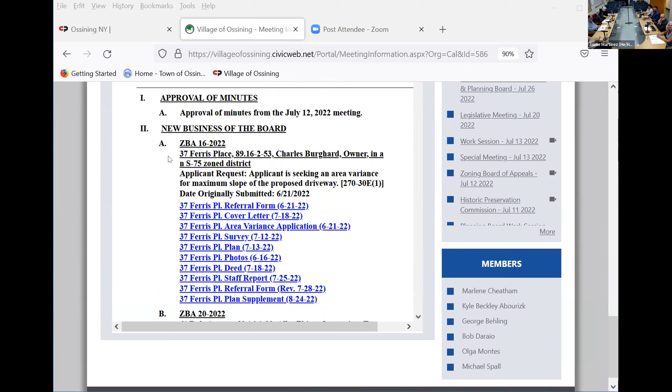When you come up before the board, you must provide your name and your address. Remember that you are addressing the board, you are not speaking to the applicant or their representative. Applicants and representatives, please remember that you are addressing the board.

We're also using a hybrid format, therefore the public will continue to have the opportunity to see and hear the meeting live through Zoom and provide comments during the appropriate time. In order to participate, please do the following.

Members of the public attending online via Zoom may use the raise hand feature at the appropriate time. If you would like to make a comment, the feature is located at the bottom of the screen. Those attending via telephone can press star nine.

The meeting host will see that your hand is raised or that you have pressed star nine, and will unmute those waiting one at a time so that you can speak.

Comments can also be emailed during the public hearing to Planning Director Jaime Martinez at jmartinez, M-A-R-T-I-N-E-Z, at villageofossining.org.

The meeting will be recorded and a transcript of the meeting will be available at a later date. There are some ground rules. In order to keep the meeting orderly and ensure we get a clear recording, please follow these ground rules.

When you're given access to speak, please state your name and address. If you are speaking during the public hearing, please limit your comments to the matter which is the subject at hand. And if any speaker is inappropriate, they will immediately be cut off and access removed.

So welcome to the meeting, and we will start by doing our roll call.

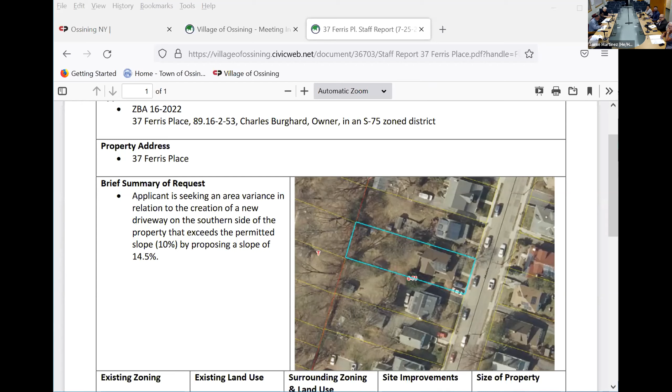Liz, are you there? Can you hear me? Yes, we can now. Great.

As Jaime had mentioned, we are looking to extend an existing driveway, basically to match the driveway of the adjacent property owner and the driveway on the opposite side. There is currently a small parking slip at the top, and then a grass slope leading to the backyard.

Share your screen. Would you like me to share for you? Great, okay, one second please. And here we go. Can you see it now? Yes. Great, sorry about that.

As I had said, we have an existing parking slip at the top off the street, and we are looking to create a driveway along the side of the house to allow access to the rear and to allow for a second car. We are looking to match basically the grade of the adjacent driveway, which is 2 to 4 feet away from the proposed driveway, and the grades would basically, for the most part, match.

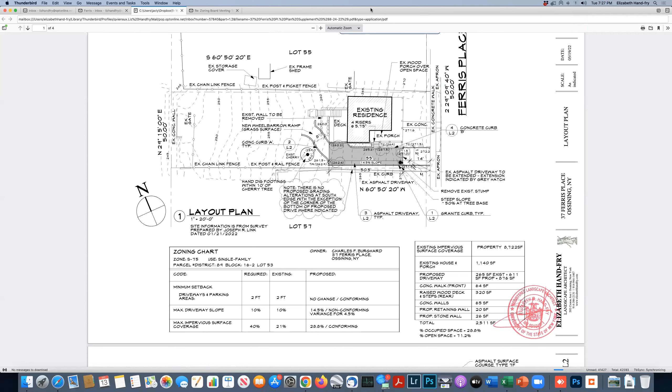Yeah, she's doing the 61 Dale Avenue.

So for 61 Dale Avenue, Alba Zhina is the owner. Let me get a little rundown of what the project is. The applicant is seeking area variances in order to construct masonry and stone stairs on the side yard.

So we have the applicants, the architect here, Michael Bevivino. The architect, Michael Bevivino, is here, as well as Alba Zhina, the owner. And they're prompting the family to come forward.

Good evening and welcome. Good evening, everybody. My name is Michael Bevivino. My architecture firm is Named Architecture. We're located in Ossining at 6 Americo Circle, actually right around the corner from 61 Dale.

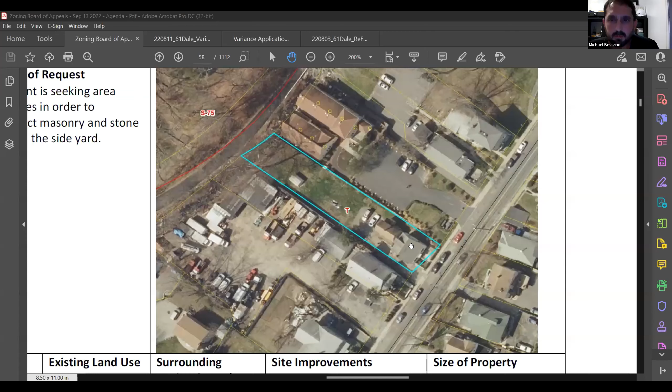No, there is a stairwell in progress, but it was never completed. Hello? Am I allowed to speak? Not yet, not yet. Thank you.

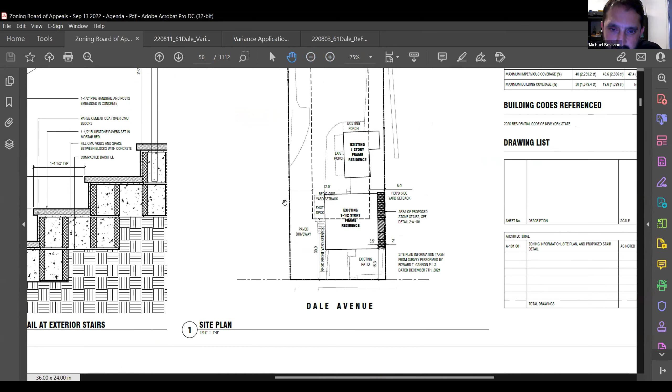So taking a look at the site plan, here's the existing home at the front. Sorry, is that better? Yeah. Okay, so this is the location of the home at the front of the property and the second one at the rear. On the left-hand side is the existing driveway headed down into the rear of the property. And on the right-hand side is where the proposed stair is.

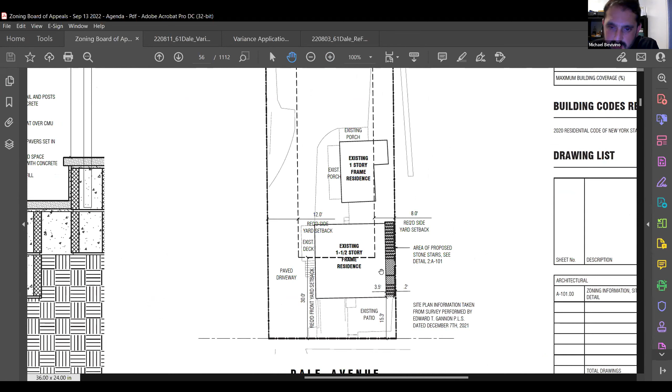So we're requesting a variance from the required 8-foot side yard setback, as well as the combined setback of 20 feet.

Just zoom out and show some pictures. Alba had started constructing the stair before realizing that they needed a permit for it. It's a little glitchy, but you can see the stair is partially constructed on that right-hand side. It's planned to be constructed out of CMU and bluestone pavers.

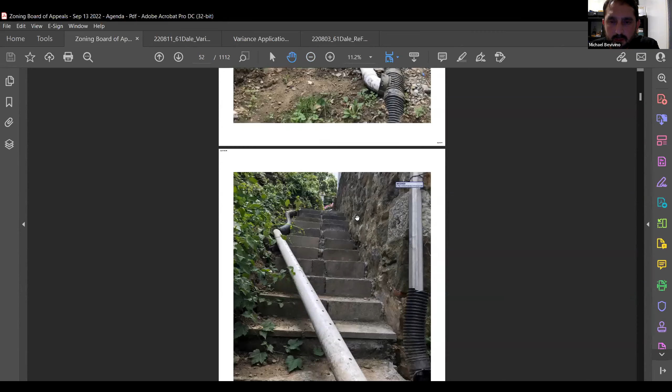Sorry, this is so jumpy. The stair will only add about 99 square feet worth of impervious surface. The existing impervious surface is non-compliant, but it's a de minimis amount of additional area.

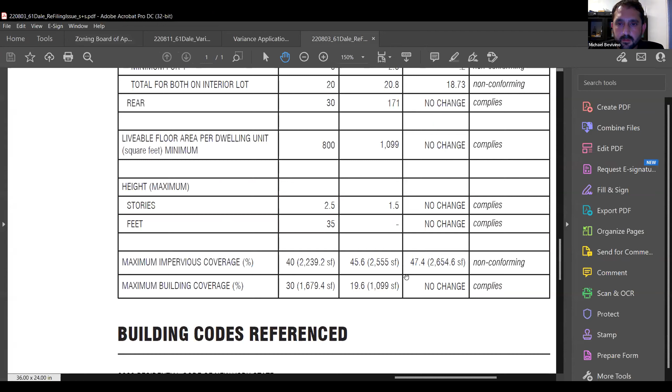Anybody have any questions? Are there any questions from the board? I just want to be clear. So what we're saying here, in the impervious coverage, is supposed to have 40%. It's already, the existing is 45.6%. And we needed a variance of basically 7.4%, which would make the impervious coverage 47.4%.

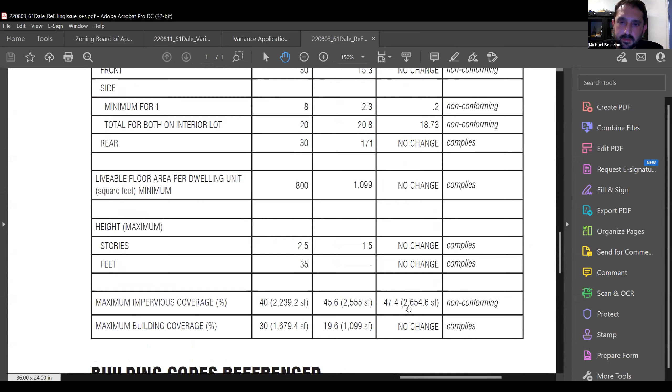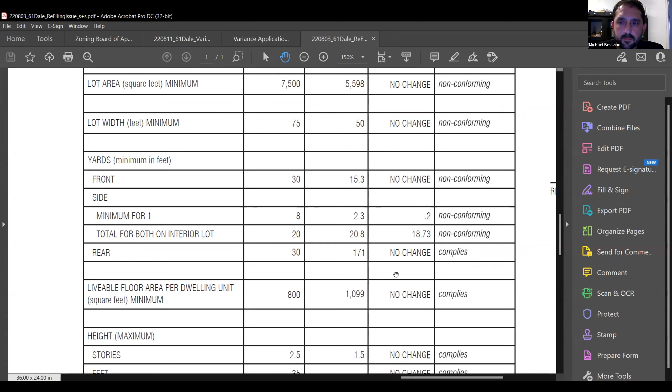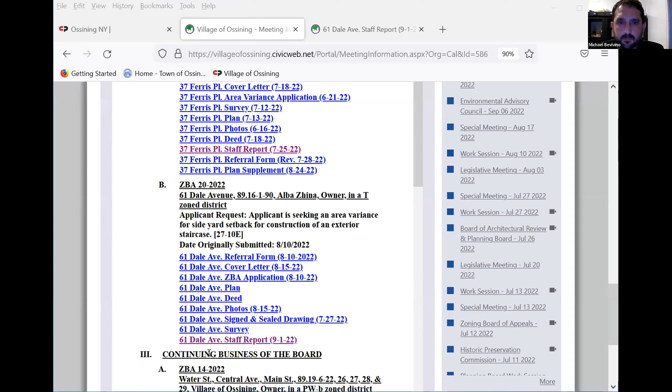Okay, no more questions. Yeah, Michael, this is Mike Spall. I was wondering, the purpose of the stairway on the right-hand side being built out of concrete materials, is that for egress and entrance by the upstairs tenant?

It's a convenience stair, just to access the rear of the property. So it is not the sole way for that tenant to get in. So just to clarify, the second unit is actually in the back, in a separate structure, so it's not the upstairs, it's in the back.

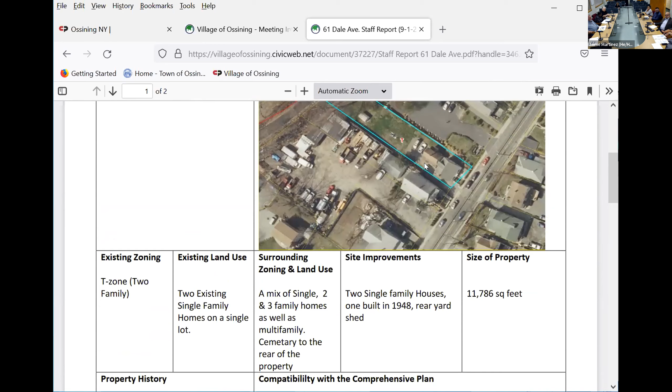So as he was explaining, the only way to access it right now is to walk down the steep driveway if you're not driving. So the idea of the stair was to provide access to that rear structure for someone walking.

If I can, you can see here's the building. This is the second unit in the house back here. And so, as you mentioned earlier on, the only way to get into that second property is to walk down this driveway, which doesn't have steps. And in the colder months when it gets icy, it can get a little more dangerous. So therefore, they are trying to add a separate set of steps here so that somebody can walk to that back.

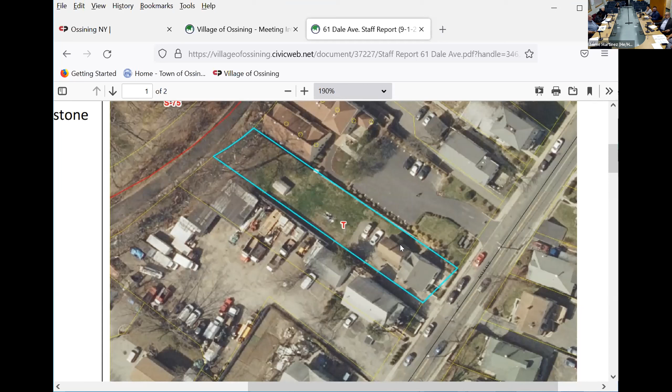One thing I just want to mention is that there's a number of other properties on that northwest side of Dale Avenue that have stairs constructed in their side yard setback, essentially to address the same problem.

There's no indoor access to that second structure? They're not connected, the two buildings? No.

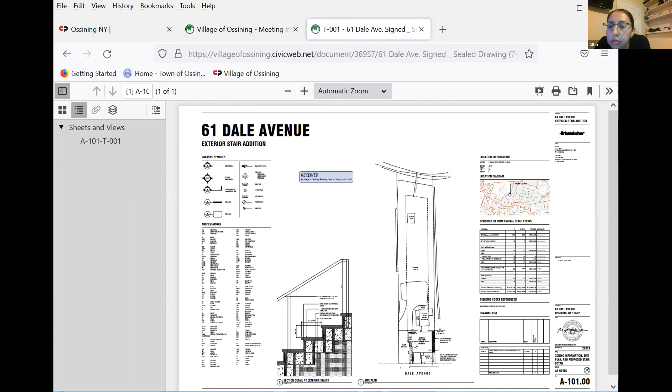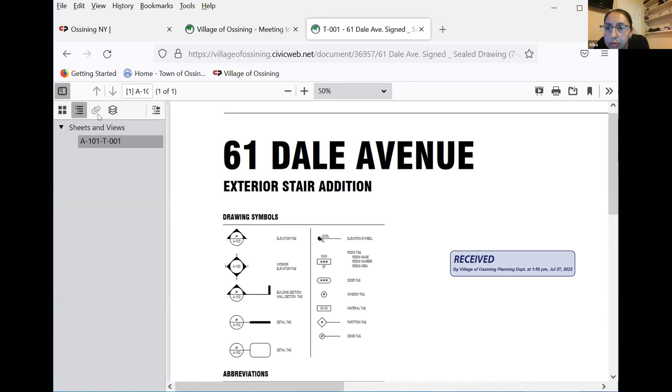It's too narrow, only enough for the car, so they have to build them on the other side of the house. Plus, if my memory serves me correctly, the existing was on the left-hand side of the property, the first building - I believe it was wooden stairs.

Away from one side. And so the total of both is - we don't know the setback, we don't know. We've gotta meet that setback - let's take a survey.

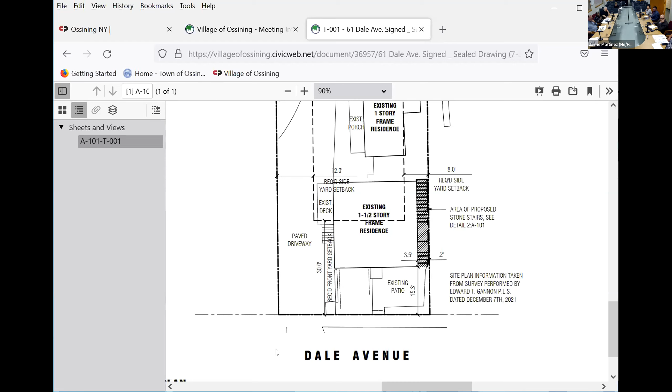Sorry, we're just trying to make sure we have the variances right. Sure. I think he has it down there.

It's 18.5 - is that from the deck or the house? That's to the house, not from the deck. The deck would count for this purpose. We need to know the setback to the deck.

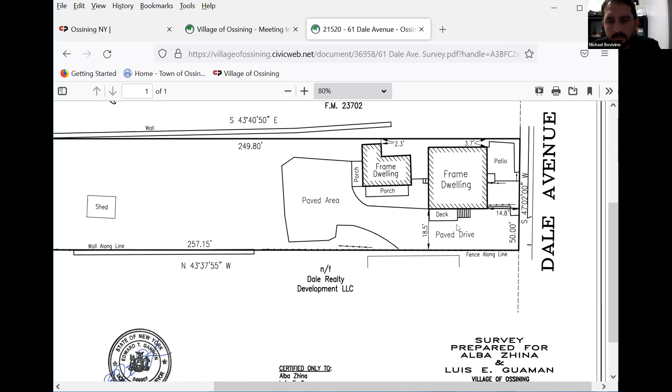I can give you that dimension right now if you'd like. Yeah, sure, you want to go ahead and share your screen? So we know how to do it. Sure.

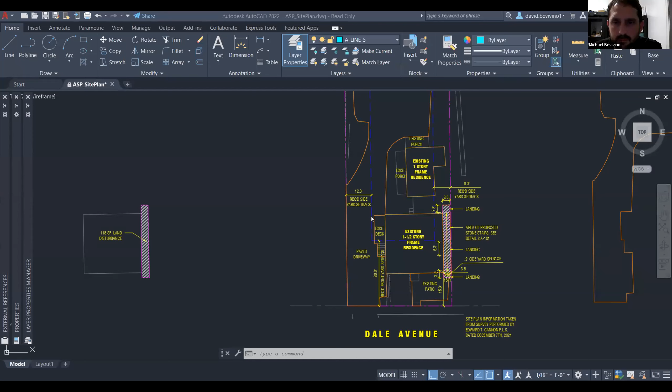No, we just want to make sure we have the numbers correct. Oh, okay. Oh, well, that's - yeah, the deck is within the setback. No, the deck complies, it looks like it's.

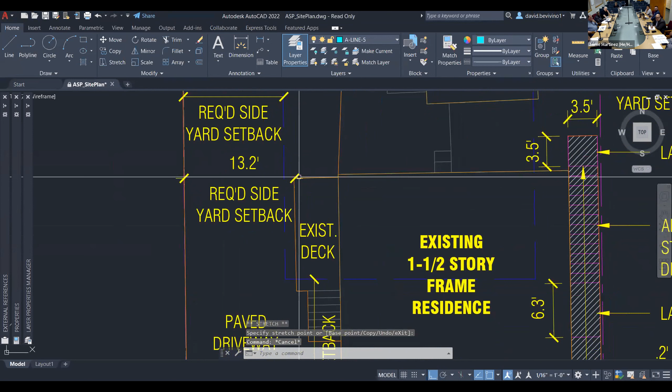So the 12-foot setback line was just, maybe like 13 feet or. Yeah, but the question is where are you getting the dimension from? Are you scaling it or is this off of the survey?

No, this is a scaled drawing from the site survey plan scale. So at the end, when they finish the construction, they would have to give me an as-built survey, and if the scaling is inaccurate, you just have to get an update to your variance application.

So is the 13.2 to the deck? Yeah. So 13.2 plus, we're gonna have 0.2 - we're talking about 13.4.

So the combined variance is 6.6. And then the single.

Does he need a single? Yes, because he's down to 0.2. It was already non-conforming at 2.3. That's correct.

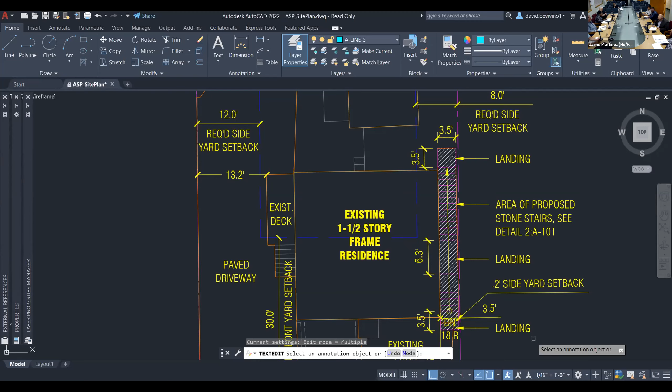Because here they have existing as 2.3, so you're saying that's 3.5? That's what this is showing. That's correct. The house is 3.7 from the side yard, and then they built a 3.5 foot wide stair. Oh, I thought it was 3.5 now when they built a 3.3 stair. Wow.

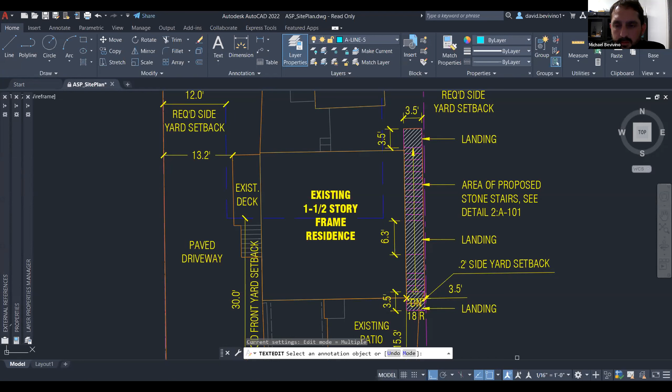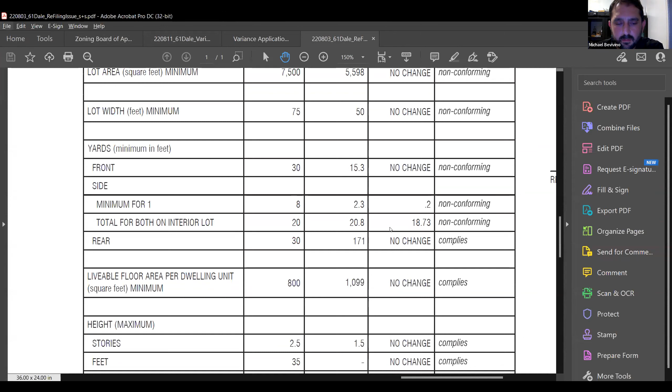This is too, okay. Did the survey say 3.7 now? Yeah, let me make sure we have the right numbers. No, I appreciate that. Let me just pull up the survey. Or what do you have, what did you have on the chart? Go back to that, on our drawing. We're just looking at the same drawing. Let me just see if it's noted on the survey. We're using the actual CAD from the surveyor, so.

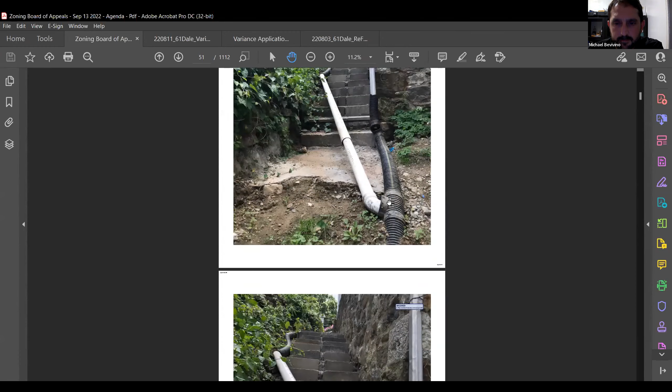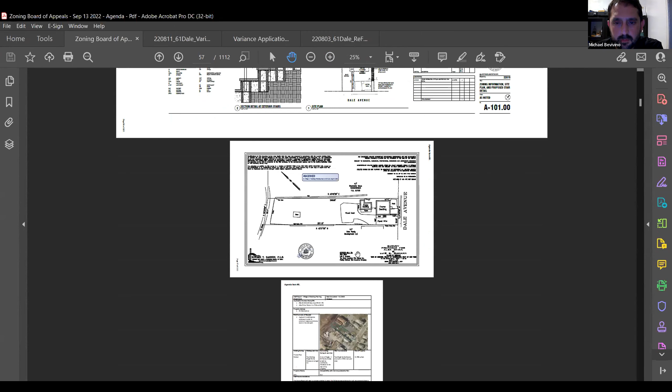Yeah, 3.7, you can see it. Oh, okay. So the existing is, well, now my other number was wrong. He put 2.3 because of the other accessory. Oh, okay. That's right. Oh, so that changes the total too. Right Joe? Well, if he's going down, it's an accessory structure. Yeah, it's an accessory structure, so really it goes from the main structure. Because accessory has a different setback.

Okay. Wait a second, so you're saying that the second house, it's a house, it's not like an accessory structure? Still considered an accessory structure? Okay, so it doesn't, so combined should be the same, except I was using 3.5, not 3.7. Well, 3.5 is the size of the stairs, he's leaving 0.2 at the end. Right, so the balance should still be the same, and the one side should still be the same.

So the issue is still 7.8 requested. The issue is what the existing is, it's the side of the deck, so he's proposing 0.2, so he's going to need the variance. It's 7.8 for one yard, and 6.6 for a total of both.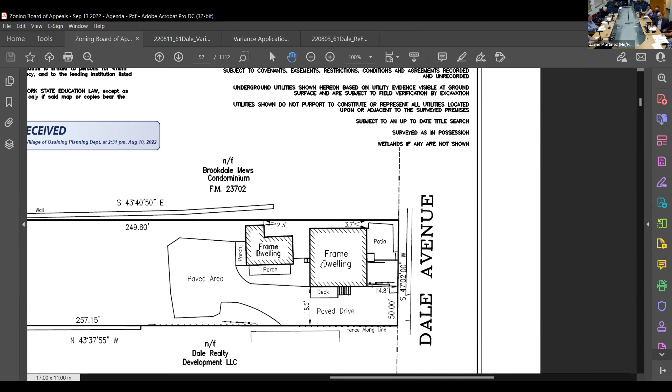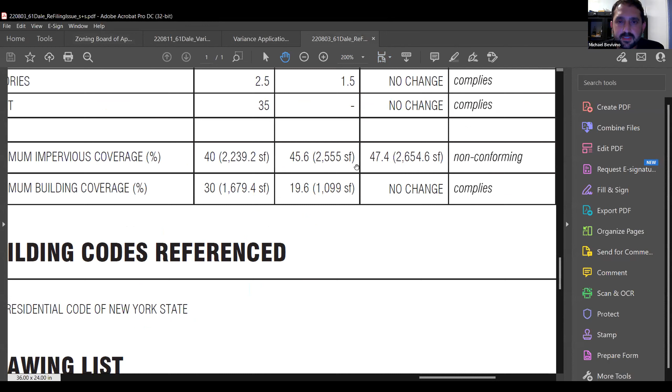So the increase for the one side yard is 7.8. It's about 100 square feet increase in impervious. Yeah, the numbers that you're looking at for the variance don't recognize that it's already non-conforming. Right, it's giving you the total. Got it. Okay, so the variance request is 7.4%.

Right, of impervious. Okay, I have the numbers here. So 7.8%, 7.8 feet for the one side yard, 6.6 for the total of both sides combined. So to explain that, the property on the other side is beyond the setback requirement for a single family, so that's why it's a smaller variance than we're combined, obviously. So 6.6, and then 47, 7.4% variance above. And if you want to know the increases from the existing non-conformity, we can do that.

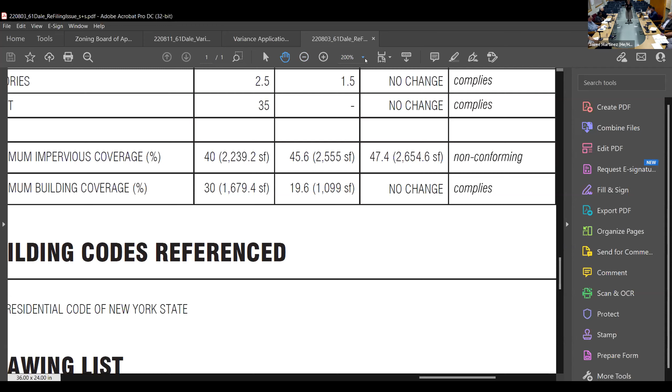No, it's not. My name is Pamela Bucko. I live at 65 Dale Avenue. The condo is right alongside 61. I've lived there for 25 years. And the people that were previously living in the 61 location up front and the bungalow in the back, I've known them all 25 years that I've been there. The tenant in the back has only been there 22 years, I might have that off by a year, but that doesn't matter. A couple of things I noticed that were said.

Well, let me tell you why I'm here. I'm here because I have concerns. You have actually pictures, I brought pictures, but you already have pictures of, we have a retaining wall that runs alongside the property of 61. It holds up our driveway. And 18 years ago, we put that new stone wall up, which is a $25,000 wall. And we put drainage in there.

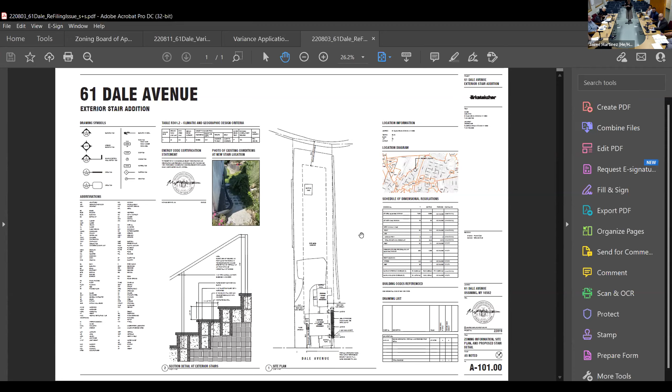Pull that up, see? Yeah, you can see the wall in the one picture you have, the colored picture. You can also see it on Google Maps as well.

Are we going there? Yeah. You can continue while... oh, we're okay.

So my concern is seeing the structure so close to our property line, and all the dirt being thrown up there when the construction was happening with the building of the stairs. Now we have this big huge wall of dirt, and it's half on our property, half on his property.

We also put in a lot of pipes for drainage so that nothing would interfere with this tall, huge wall. You can see that whole white going down there, that's the wall, and our cars are on the other side of it. Our big concern is...

I'll say it the only way I know how, not technically like you do, but our big concern is messing with the earth there. It's gonna cause some kind of shift, and that's why I was concerned about what the architect found when he examined what was going on. It's very close.

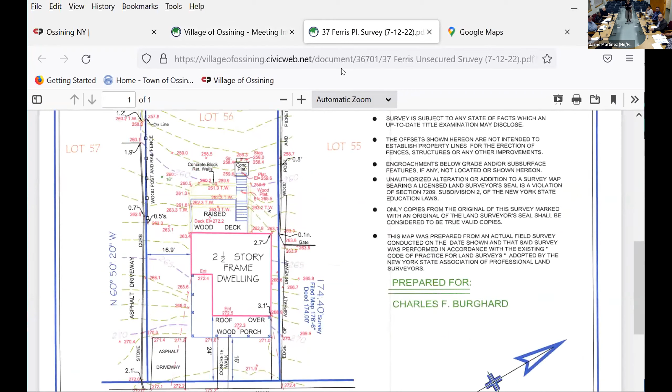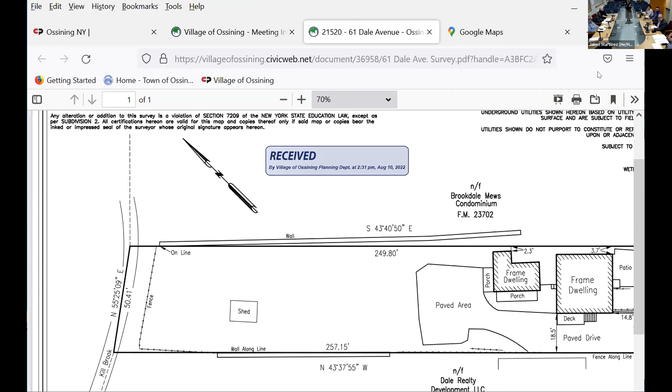The tenant in the back told me she was told the stairs were being built because there's no place on the driveway side of the house to build them. But there is, because he already has stairs there with a side entrance to the two-story house. He has a front entrance that goes upstairs and a side entrance that goes to the first floor. So why can't he just put stairs on that side?

I don't know, ma'am, just the rules. Can I ask you a real quick question? Because I just want to make sure, I'm sorry, I just want to make sure that I'm capturing this properly.

So they are proposing to put a stairwell into the first dwelling unit down to this area, and the retaining wall is on the survey, here. How is that going to help that back bungalow when the entrance to get into it is on the lower side of that structure?

I want to clarify, they are not proposing to put anything near the retaining wall, they are up on the top. So is there another retaining wall up here?

Well, it's not a wall, that's our problem. It's almost level with his property now, but he's throwing all this dirt up here and now it's a big hill.

But I guess the question is, will the dirt be removed? I just want to clarify what you're asking, because you talked about a retaining wall and moving dirt around a retaining wall. The applicant's not proposing to do that. Now you're saying that the applicant is currently throwing dirt on your property.

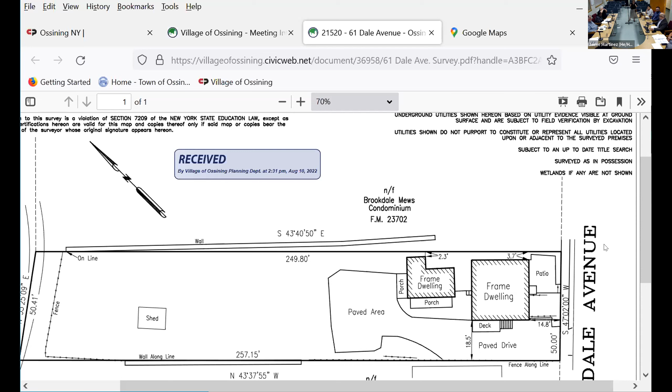There's dirt going right before the retaining wall starts, and there's railroad ties there, and then the retaining wall starts, and there's more dirt being thrown. So there were some pictures, we have... let's see the picture. So are you asking for them to clean up the pile of dirt?

I am asking that, if you get a building permit, this is my understanding, when you start messing with the earth and building something, an architect comes in and makes sure everything's kosher, so you're not gonna shift the whole structure of the wall.

I understand that she is concerned over the structure of the entire driveway, both her retaining wall and the part before it starts, correct, and whether or not the earth will shift with all the disturbing that they're doing.

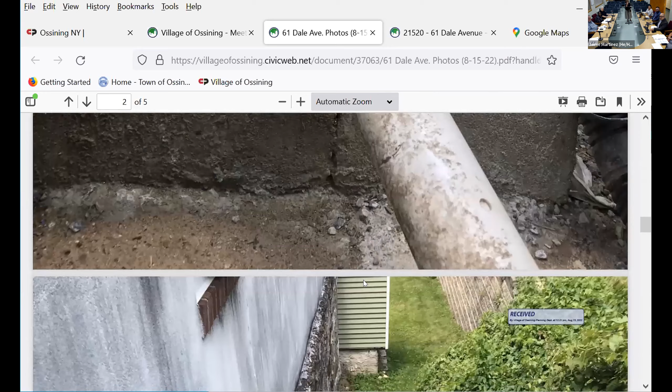It does look like the applicant has a tube running along that side. If there's anything happening over here, that's not their property, that's your property. Can you get the picture looking from the top of those stairs he built down? You see all that mess on the side? That was never there. That's all new earth, which is now growing weeds.

So the board can add as a condition that they have to get the property properly staked out. We had mentioned this to them in the meeting, that because they're so close, they need to get it staked out prior to doing any work. So we can add as a condition that they have a property stakeout - the surveyor has to come and delineate where the line of their property is, so that you would know and they would know not to do any work outside of their property line.

It would make it a little easier. Because the way I understood it when we built the big retaining wall, it's on your property, correct? Yeah, I do have a question for Mr. Bevivino.

So you right now have a temporary installation to put in some sort of storm drain. Where is that going to permanently be installed, and where is that going to discharge? To be honest, I'm not sure. I think the intent was that it tied into the existing drainage system. That wasn't entirely my question actually. Are there drains in the driveway in the back?

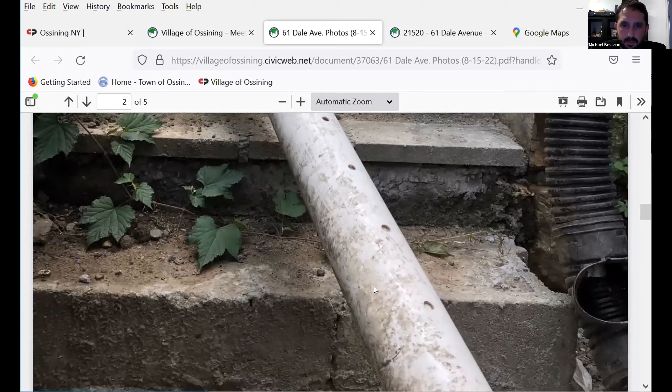And there's some pictures showing it's kind of - yeah, so where it's going to, it looks like it's leaking. Yeah, I think this is just a temporary thing during construction. Well, the reason why I ask is because you're so close, you're pretty much on the property line. Unless that's going to be laying across the staircase, you could not install it on the neighbor's property, so I don't know if you have some sort of plan on that.

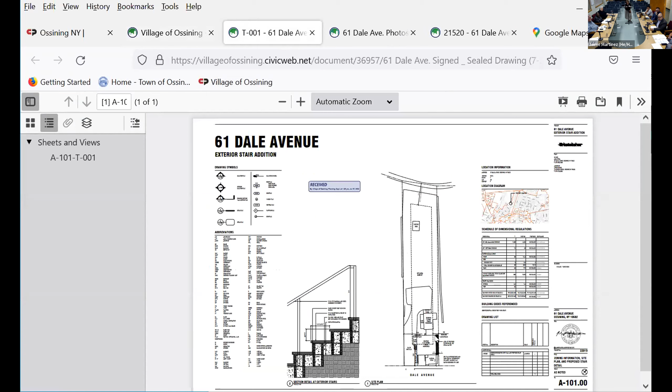And it looked like the leader was tied - well, also she brings up a good point. How are they supposed to walk from the stairwell to the entrance door, when the entrance door's on the other side, not where the stairwell is located? And if they have to increase the impervious surface to get there, if they have to do a walkway, which currently looks like dirt in their own pictures, when they need to increase impervious surface - that's a basement door on the bottom side, so what's the plan to turn this, because it's a stairwell now, are they planning on putting any additional walkway here to get to this impervious surface that's over this way?

Otherwise, if you're walking through mud in the winter, that's going to be a whole lot of trouble. Yes, this is actually a walkway between where the stairs end and here's the entrance of the house, so yes, you can walk through freely.

Is it grass? Right now this is stone, like grass and stone. And it's going to remain that way? It will remain that way, yeah, because it's clean, it's an area that you can walk easily.

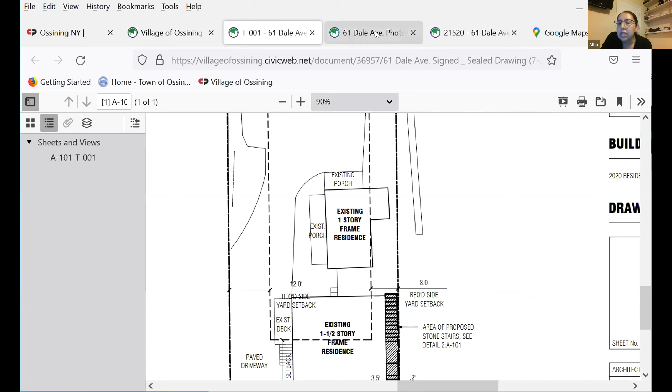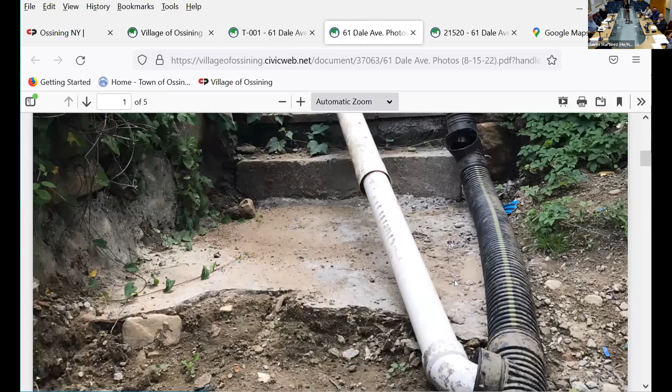This is the space, the connection between the two houses. You can't see it in here, but in the photos you could see - the first photo, I mean, you see the dirt here, and then that's the landing, that's the bottom of the house, and that's the landing, what you just referred to as like stone and dirt and grass - we can only see a portion of it, but that's what it looks like there. Could you leave that picture up for a minute? And it looks like it's tied, this pipe of water, looks like it's going down underground or something.

I have a question, Bob. That pipe, those pipes, it crosses the stairs - that's a hazard, isn't it? Well, it's not going to - that's why it's temporary. That's not what I'm saying, but that's why I asked the question, what is the plan, what are they going to do with that? That's temporary, their construction, but there's got to be a permanent way of putting - what's the plan to put the piping in? It's going to continue to discharge the water into that pipe, which I'm assuming is going to some sort of dry well.

So I have a question, and I'm gonna address this to Linda before we go any further, because I think there are more questions than we have answers for. Right now, is it appropriate to ask for an adjournment to get some more information? Yeah, but I think you should make sure they understand what additional information you want, maybe some pictures of the back showing the area going from the bottom of the stairs to the entrance to the rear building, because the concern there is, are they then gonna want to build a solid walkway, and that increases the impervious surface even further.

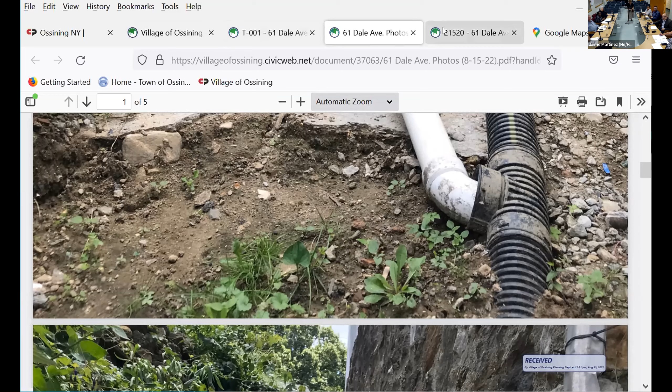For what Bob was saying, I would ask for before and after photos, because we don't have the benefit of seeing it before the variance was granted. They already started the work. We don't know what the pre-existing land looks like. Could I ask one more question?

So in the picture, it's hard to tell. I can imagine it in my mind, but there has to be a before and after, whether that's from 10 years ago, because the earth doesn't change that much. Well, this is a new owner, so they may not have it. That property was recently on a real estate site, so there should be some pictures.

There's a question that maybe the architect or the property owner can answer, if there was no stairs there and that was a slope, and you have stairs installed there, when the dirt was removed from there, where was it removed to? So there was a hedge there before. That picture is from July 2021. Well, that hedge is no longer there. Well, if there was no staircase there, I'm assuming that was just the natural grade slope.

So to be able to install what they started, dirt had to be removed. Is that the dirt that's on the side? The hedge is gone, where did that dirt go? It gets thrown up on the hill on the property. They may need to restore that, if you would have pictures of what that hill looks like.

I'm gonna look when I get home, but like she said, I think I remember seeing them in the real estate pictures when it was on the market. No, they take them down when it's sold.

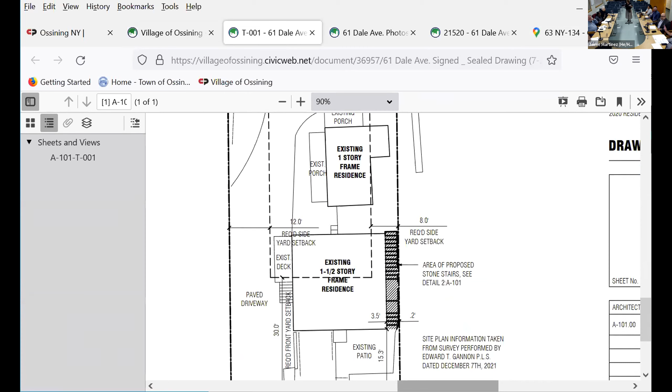Is this a 2-family or a 3-family? You have more questions? Yeah, I did have one more, but you kind of touched on it. Is this a 2-family or a 3-family? It's a 2-family. The whole property, the main house is 2-family, and the apartment in the back, is that a 3rd unit? No, it's a 1-family front house and a 1-family back house. Looks like at one point there were 3 mailboxes.

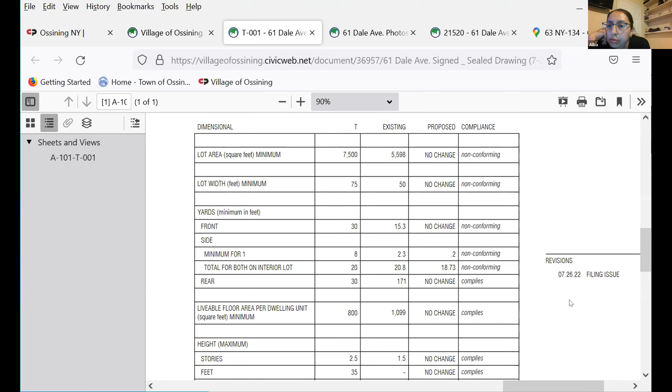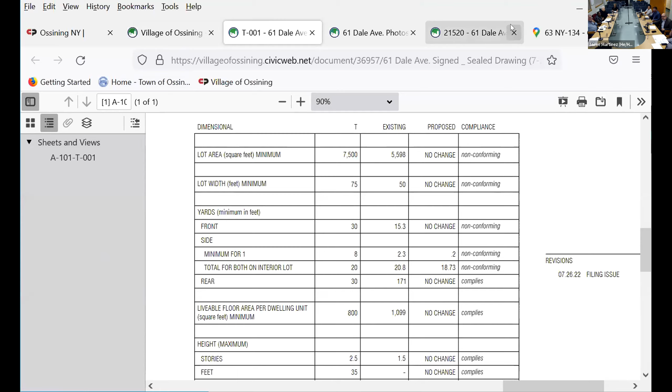Do we want any guarantee with regard to the fact that it's a professional engineer or architect? Michael Bevivino is our professional architect, so that we can say the retaining wall won't be affected. Well, the retaining wall's not adjacent to it, it's 20 feet away, from the very end of the stairway. Michael, can you do a dimension from the edge of the stairs to the nearest point of the retaining wall?

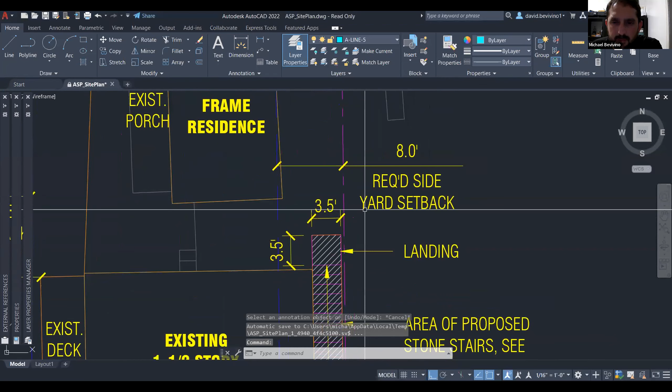Just for what purpose? He has the actual digital drawing from the survey, so he can take that measurement right now. Which is helpful, we'll take that. From the bottom corner to the nearest point on the retaining wall. 17 feet 9 inches. Okay, that's fine.

I think in light of the fact that we have some questions that need to be answered, I'd like to entertain a motion to adjourn this. The public hearing is still open, we did not close it, but to adjourn this applicant until the October meeting. So we adjourn the public hearing and adjourn the application until the October meeting.

Need a motion. So moved, Kyle. Seconded, Olga. Do we need to do the same for adjourning, so we just adjourned the public hearing and the application, and now we can do it together. Oh okay, so it's both done together. So do we need to do a roll call vote to adjourn, or can we do it another way?

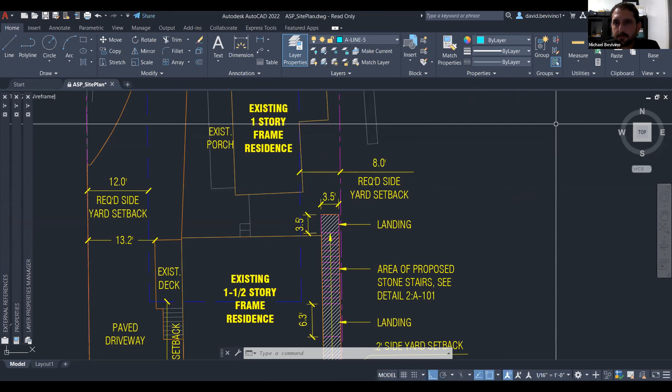Will new letters go out to the neighbors? No. But you can go online, you'll be able to see if they have something in their return — it'll depend on them submitting new materials. If they submit those materials by the revision deadline, they'll be on the new agenda; you can check online about a week and a half in advance. If they're listed as adjourned, they're not coming; if listed as continuing business, you can call it off. Thank you, you're welcome. So we are up to continuing business of the board.

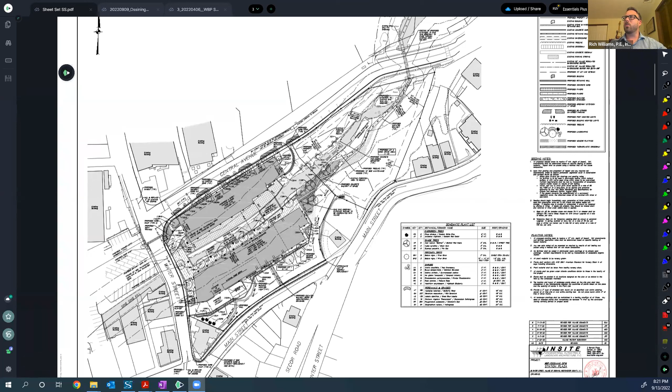Everybody should be looking at our site plan now. I'm going to work down the table that was provided that Jaime went through and summarized. The first variance is for the parking structure being located within 20 feet of the street.

There's 20 feet required; we are providing 8.5 feet. That is located in this portion of the property, where the parking garage comes closest to the property line. It's in the spirit of trying to provide the requisite parking for both our project and the village. The 4th story of this garage will be public parking. Also, we are mimicking the footprint of the existing DPW building that's on the corner there. So an 11.5 foot variance is sought.

The second variance is for a parking structure being within 15 feet of the lot line. Again, that occurs right here at the same corner. We have 1 foot provided and a 14-foot variance sought.

The next variance is for the minimum setback for parking or loading areas from the street or lot line to the parking structure - 10 feet required. Again, it's this front corner where we're providing that 1 foot, so a 9-foot variance is sought from that provision.

If the board wants me to stop and re-review the application, what it's comprised of, where things are located, I can do that. I just, in the interest of time, know you've seen this application before, so I thought I would jump right in. But if you need me to go back and review anything, stop me at any time.

The next variance sought is for impervious coverage. What's really driving that is a proposed subdivision of the property. As Taylor mentioned, we are going to be extending the Sing Sing Kill Greenway down through the site, and the village is going to retain the northern, forested portion of the site, allowing that to be preserved. As a result of that subdivision, our 3.2 acre site now becomes 2.1 acres, so we're at 65.6% coverage. If we weren't doing the subdivision and you were looking at the property as a whole, a variance wouldn't be necessary.

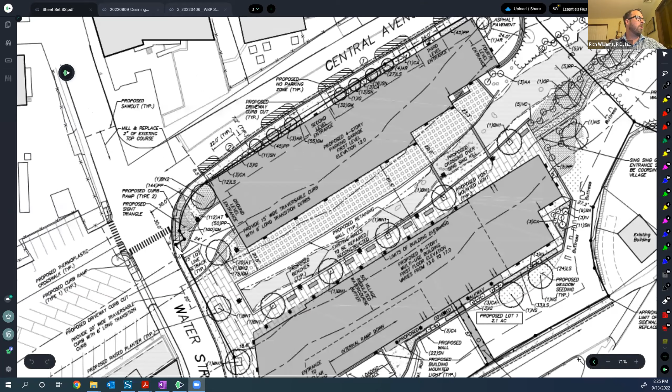The next variance, we consulted with Jaime and village staff on how to measure this, so there's a change in the table from our submission. The code provision is that a driveway entrance can't be within 50 feet of an intersection. Our submission had cited that we were providing 42 feet and seeking an 8-foot variance, but based on a clarification as to how we measured, from our proposed driveway to the intersection of Central Avenue, we have 40.5 feet provided, so a 9.5 foot variance is sought.

The next variance sought is for proposed parking on the first floor extending a minimum of 40 feet back from the building line. We have a building line of 15 feet from Central Avenue, and not only are we not 40 feet back, but we are beyond that building line. So we cited providing 0 feet and are seeking a variance because we are over the building line.

The last variance sought, other than the habitable space, is for 30% of our parking being along the frontage of Central Avenue and Water Street. You're allowed a maximum of 30% because of the parking garage, which is considered parking, and because of the subdivision lot line here. 75% of our frontage along Central Avenue will be parking, although it'll be located in a garage structure. Similarly, along Water Street, 32% of our frontage is parking, but again it's located in the garage. So as a result, we'll have a 45% variance sought along Central Avenue and a 2% variance along Water Street.

Before I turn it over to Maxwell to discuss habitable space, does anybody have any questions?

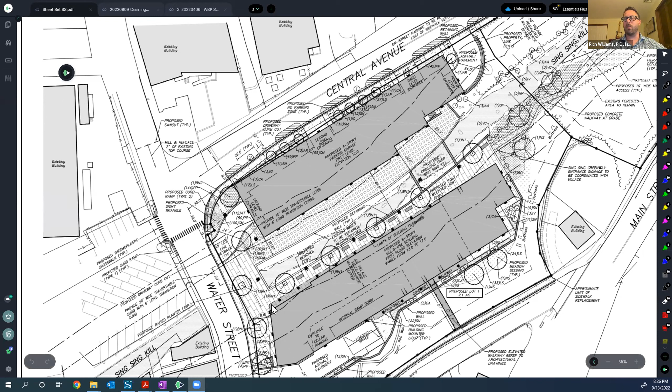Rich, this is Kyle, for the benefit of the board. You had mentioned last time, and I didn't hear it this time, I thought it was great. One of the questions that came up was drainage and the water itself, and you had talked about the tanks that are built underground off the kill. Do you want to mention those again?

Sure. In addition to the stilling basin and the piers, we've developed a stormwater pollution prevention plan. Currently there's no stormwater treatment at the site. The site acts as a DPW yard with composting and waste C&D materials often occupying the grounds, which are directly tributary to the kill. We have a series of improvements with respect to stormwater. The first is a green roof on the building, which is a New York State DEC recognized green infrastructure practice. The second is a series of hydrodynamic separators located on our stormwater collection system. Those devices create a swirling action of stormwater that allows floatables to float and settleables to settle, things like sand and grit. They're in enclosed structures that can then be cleaned out periodically, providing an additional stormwater benefit than what currently exists on site.

Thank you, Rich. No problem.

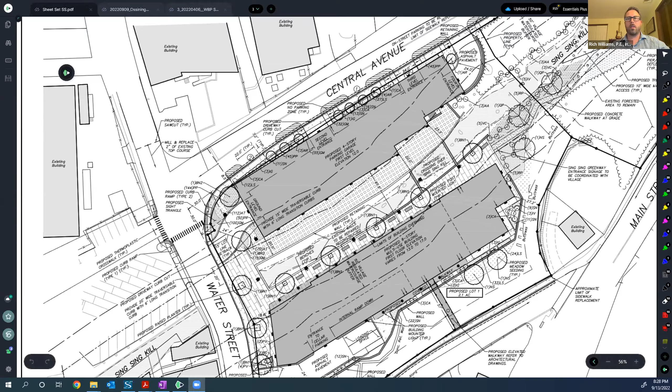Maxwell, you look like you're somewhere sunny. I am actually on the West Coast right now. But all right, can everyone see my screen? Yes. Yeah. Okay, all right, great.

Okay, before I start into this, if the board would like me to go over anything architectural, the plans or anything, I'm happy to do that. But short of that, I can jump into the issue of the habitable areas for the units.

Okay, I'll just keep going then. So at our last meeting, we spoke about the variance requests relating to the minimum habitable unit sizes required under the Ossining zoning code, and how practically achieving those dimensions would result in units that were less desirable in terms of the amenities we would otherwise want to put in, like larger closets, more storage areas, secondary bathrooms, and those sorts of things, which are all excluded under the definition of habitable floor area.

But the issue also was that expanding the units to meet the zoning code would result in larger units than is allowable under the Homes and Community Renewal program, which is the HCR program that this project also needs to comply with. I think those are the major constraints that were an issue in terms of the habitable room size requirements that we're not currently able to meet.

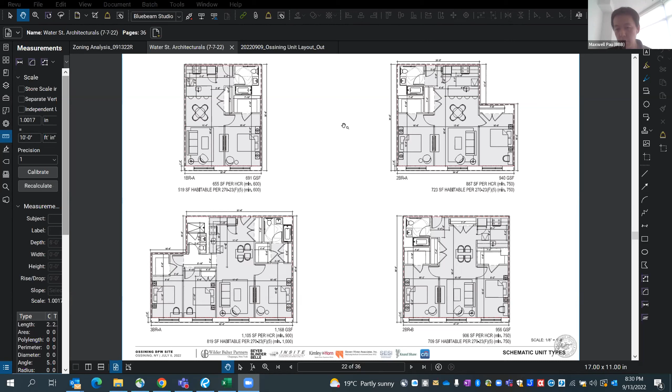So I think where we left off was the discussion about how we measured the habitable areas and what we were able to provide. Since then, at that time when we first talked about the subject, we had presented 4 of the most typical unit plans we had at the time for the project. What we've done since is identify every single one of the different unit types on the project, which is this set of plans here, which I think you just received. We were going to formally submit this for the next zoning board meeting, but I can walk us through it so you're all familiar with what we've done.

So there's 3 pages. Each page represents one unit type. The 1 bedroom is the first page, the 2 bedrooms are the second page, and the 3 bedroom units are on the 3rd page. What we've done here is try to measure everything as we see is the intent under each of the code requirements.

So I can take us through this unit, which we've seen before, right? Previously we had submitted this 4-unit plan here. This is the exact same unit. The gross square feet of this unit is 691 square feet. If we look at what we've recently done, it's the same size overall unit. The GSF is just the standard market measurement process, like if you're comparing unit sizes from jurisdiction to jurisdiction or building to building, typically the GSF square footage is the gross square footage of the unit.

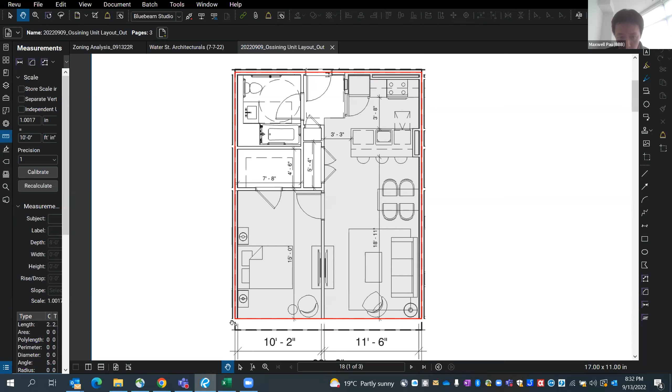The HCR measurement is everything that's defined under this red outline. If I zoom in a little bit, you can see there's a red outline that goes to the demising wall, does not include the exterior wall, which is this sort of white zone over here, but everything within it is counted under the HCR guidelines.

So that's for this same unit, it comes out at 655 square feet. We've also added in what the minimum and maximums are allowable under the guidelines. Under HCR, the minimum unit size is 600 square feet and the maximum is 745 for a 1-bedroom apartment. And the 745 also includes about 20 square feet in this case of bulk storage.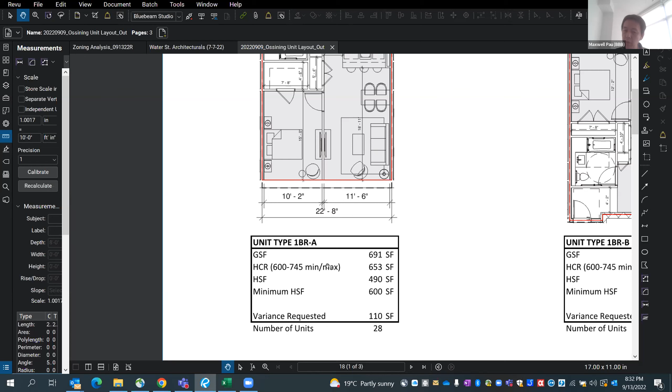So under the HCR guidelines, there's a requirement for the minimum and maximum of a unit, and then you also need to provide a little bit of additional storage, bulk storage, as they call it. You can do that within the apartment, or outside of the apartment. But what we've done, just to widen that range of minimum to maximum, we've included it into the unit itself. So for 1 bedroom, it's 600 to 745, and we're coming in with this unit at about 653, sort of in the middle there.

And then the HSF number is the habitable square footage calculation that we've measured using the Ossining zoning code, and that's everything that's indicated in the gray hatch. So if we zoom in here, so it's a little easier to see, everything that's colored gray here is counted towards the habitable square footage. Anything that's white is not.

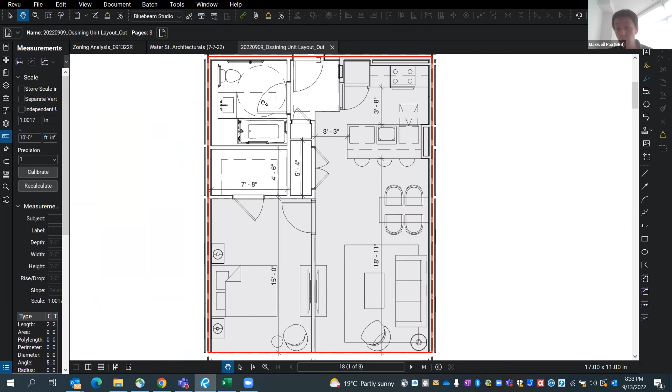So your code does not allow us to include things such as foyers, closets, right, whether it's a linear closet, linen closet, or walk-in closet, those can't be counted, or bathrooms. And also, as you'll see in the larger units, corridors also cannot be counted. So when we take that measurement of the gray that's in here, for this unit, we're at 490 square feet, so we are at a deficit of 110 square feet.

So that is the worst case scenario of all of the 1-bedroom apartments that we have. If we look at this typology, we're at 110 square feet for the variance request. And then for the other 2 units that we have, they're slightly bigger, so the variance is a little bit less for those particular units. So this is the 1-bedroom condition. Any questions so far? I went through that really quickly, but the logic is sort of the same for the other 2 unit types.

Okay, so let me go to the next page, which talks about the 2-bedroom apartments. So these are the 4 different 2-bedroom apartments that we have in the project. This is the one that we had showed you in the previous one, and again, it did not change. It's the same overall gross square footage. We sort of just run through the same logic here.

Under HCR, a 2-bedroom apartment can be a minimum of 750 square feet and a maximum of 970 square feet. And in this case, we've taken out the foyer, the closets and the bathrooms, and we are coming out at about 669, and the minimum required per zoning is 750. So the variance request for this unit is, for the 2 bedrooms, I believe, is 81 square feet.

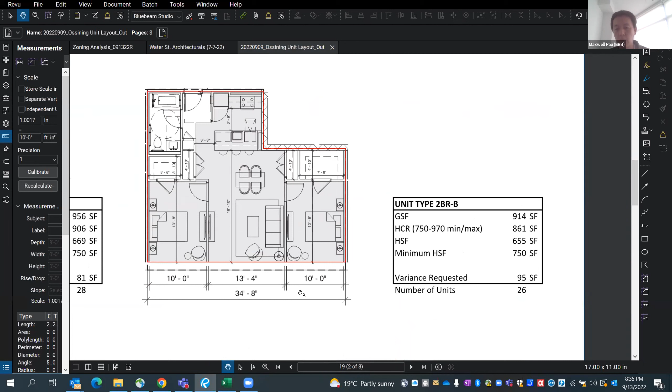One of the things that we were trying to achieve with the units that we have designed is units that sort of relate better to the tenants that use these units today. So we're finding in all of the projects that we're doing, both market rate and affordable projects, is that they want efficient units that have a lot of closet space. So we've intentionally put in a lot of walk-in closets for all the bedrooms, linen closets, coat closets, and even extra closets in certain cases to really accommodate that.

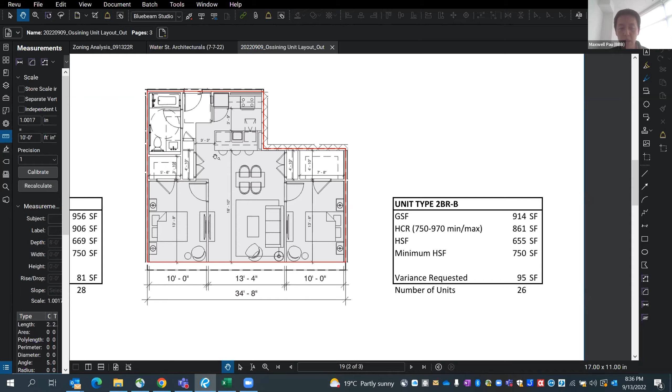All of the bathrooms are sized for ADA, so obviously that's where we need to meet that compliance path as well. So those bathrooms typically look a little bit bigger. And you can sort of see in general, that's how we've sort of laid out all of these units in here, sort of pretty efficient units, but giving ample amenities within the units as well.

Maxwell, just want to point out one thing for the benefit of the board. If we simplify this, because the visual is really helpful, the units themselves are meeting the square footage requirements. It's just that the definition itself is saying these specific areas don't constitute habitable floor area.

We did, and you'll see in our submission, we incorporated reference documents from the Westchester County model affordable housing guidance for their ordinances. We incorporated references to the Dobbs Ferry and Tarrytown codes, which provide an alternative for calculating habitable floor area, because relying on the state standards, we do meet and actually exceed those requirements, but according to the definition, we're providing those square footages. It's just not being counted because it's in the definitional section.

So I just wanted to flag that while you see the visual, those are all in the units. We're not missing square footage, it's just not being considered habitable. And that word, habitable square footage, sounds weird when I say it every time, but we just wanted to highlight for the board that it's there, it's just not being considered as part of that definition, which is generally in contrast to some of that guidance from the Westchester County model affordable ordinance.

Great, sorry to interrupt, Maxwell. No problem. And I think the other issue we had discussed last time is that even if we had all the bulk or height we needed to increase the size of the units to meet the habitable floor areas, in this case we would have to add at least 81 square feet to this particular unit type.

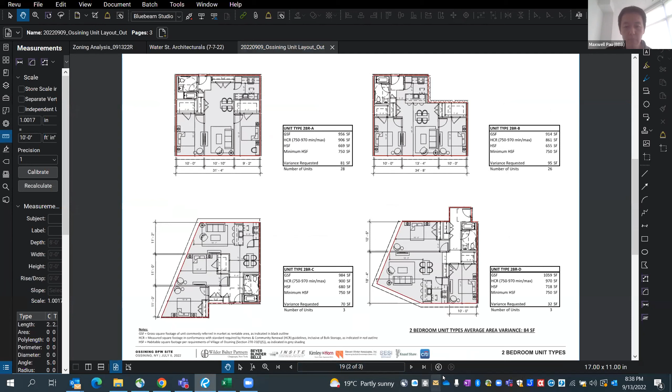If we go to the 3 bedrooms, just to finish this off, there are also 4 three-bedroom typologies in the project. The same thing applies here, except in this case it's even more extreme. These are pretty large units. This isn't really a standard 3-bedroom since there's only 9 of them, but there's 4 of these, and this is a 1,230 square foot gross square footage apartment, which is fairly sizable.

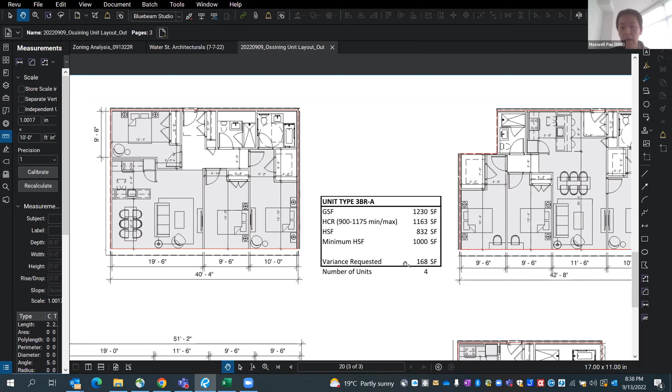Under HCR, we're at 1163 already, so we're almost brushing up against the upper limit of HCR. However, based on the way we measure it for habitable floor area, we're only at 832. So we're actually a full 168 square feet under the minimum habitable square footage requirement. And that's pretty typical of all the 3 bedrooms, just because they're so big.

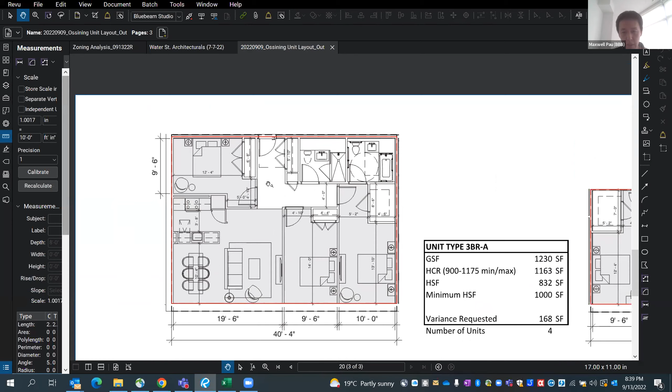There are corridors associated with 3 bedrooms because you have to get to that third bedroom. So in a plan like this, not only are you losing out on the bathrooms, but also the corridors as well. Maxwell, can you talk about, or Maxwell or Taylor, can you talk about the maximum and what that is and why it exists and what it means for these projects? For HCR, the HCR maximum.

Yeah, Rich might be able to talk a little more about the program itself, but basically the HCR Homes and Community Renewal Program has come out with these guidelines, and they actually just recently renewed or revised them. The intent is obviously to provide sizable units that people can use. They don't want folks building very small affordable units, but they also recognize there's a sweet spot. If you build something too big, then you're building it at the cost of building more affordable units potentially, because there's only so much space or resources available to build those units.

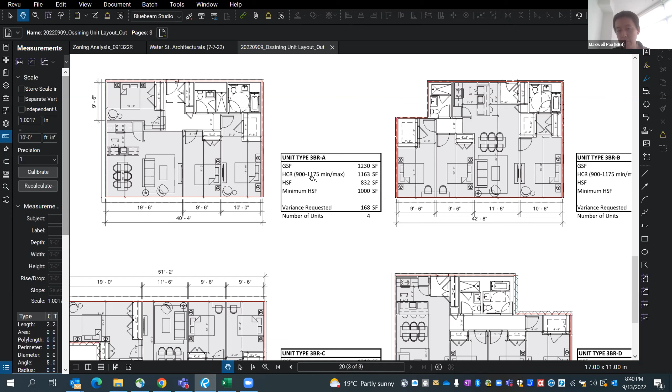So they always come out with, for every unit size type—1 bedroom, 2 bedroom, 3 bedroom, studios—minimums and maximums. For a 3 bedroom, it's 900 minimum, maximum is actually 1150. But if you add the bulk storage component, it bumps it up by 25 square feet. So it's 900 to 1175 is the range for a 3 bedroom apartment.

Is everybody clear on why those exist? I was one of the people last meeting that had asked about this. This all makes sense. Thank you. Are there any questions from the board?

I think the way they presented it this way is good. It's very clear, and it allows you to understand what variances are needed, how many apartments, and it's very clear this way. Yeah, it's almost like your code with the different numbers almost discourages the accessible bathrooms and the bigger closets.

For example, the 3-bedroom apartment, I think this is one of the clearest examples. The unit type 3-bedroom A, you can only increase it 12 to 13 more square feet, and we require 168 more square feet under our guidance. So it's literally impossible to reconcile that. So there is no change.

We run into this in other municipalities, which is why we incorporated it into our submission to your board so you can see the reference. Other communities have had this exact problem. And so, quoting language for example from Dobbs Ferry: as an alternative or supplemental standard to the minimum gross floor area per affordable unit, it shall be in accordance with the standards set forth by New York State Homes and Community Renewal.

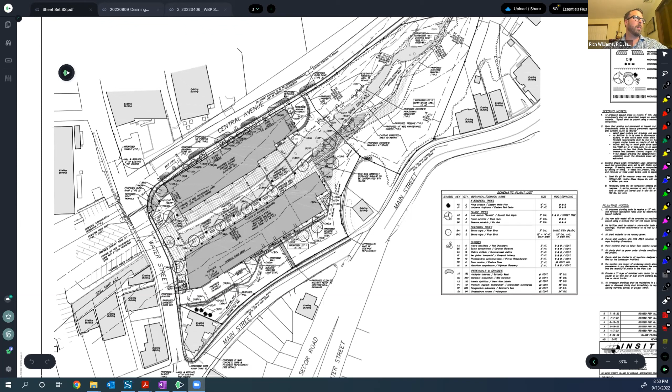But should that become a downstream choke point, the failure mode is actually this parking lot, and you would have to fail all the way back up the parking lot. Water Street would be underwater, and then it would come to our site. So the primary area we've been concerned with, in talking to Paul and Joe, isn't as much this culvert as it is the minute this becomes plugged with debris, you instantly have a tailwater effect coming up the kill that floods into the low portion of the site.

With respect to on-site stormwater, in addition to the stilling basin and the piers, we're going to have a green roof on one of the buildings. We are going to have a slight decrease in impervious surfaces, and we'll be having hydrodynamic separators on the stormwater discharge lines prior to the kill. So by virtue of the brownfield cleanup, the fact that this site won't be operating as a DPW yard, as well as the stormwater management practices we're providing, there'll be an improvement to water quality to the kill from what exists today.

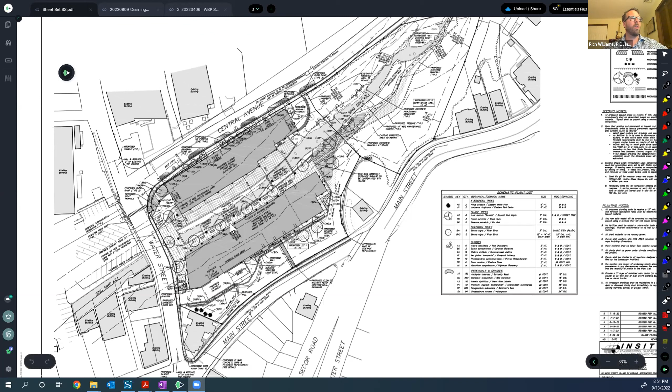Sorry, I took a wrong opportunity to go to the bathroom, but thank you so much for going through it again. Thank you. We did have a motion to open the public hearing, so the public hearing is open.

If there's no one to speak, we need a motion to adjourn. I don't know, it's still open, so I just want to make sure that there's no one to speak on that before we move forward. Again, there were some things that we need to bring back. I know the first thing was the discussion of the fire truck, so we will definitely need to find that out for a future meeting. We've talked about the different variances, the parking. Everything on that corner, that corner parking.

Do you want to make a motion to close, to adjourn the public hearing? Yes, I also want to adjourn. That's what we're gonna do. Well, before you do that, I want to ask you if it makes sense. There are a few that are not going to change. Some of these are definitely not going to change.

It might be worthwhile to at least talk a little bit about the 5 factors for things like the parking garage, the location of the parking garage. The impervious numbers could change, right? We don't know about that one, and that's the big one, but the ones associated with the parking -- so you could do that, or what we could do is say we're gonna have to get reacquainted with everything at the next meeting and go through the 5 factors. You could go through the 5 factors today, hold off if you think you have a sense of where you're gonna go till the next meeting, but sort of go through that analysis today.

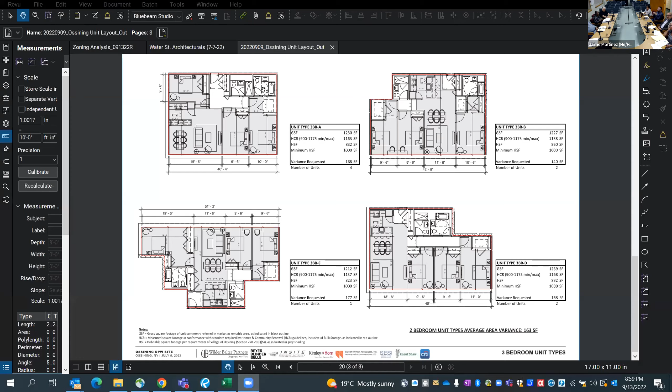I have a curiosity question, not critical to our decision making at all, but what are your plans for handling those who might want to park in that garage when they're not supposed to, like the railroad commuters? The top floor is open to the public.

The top floor is public parking - the fourth floor is public parking, and it's going to be owned and managed by the village. That's separate, but it'll have its own separate entrance, so the 3 levels that are for the residents will be controlled. Just curious, because you're gonna get a lot of those.

Well, sorry, that's not correct. The bridge top is from the building - one of the levels of the actual building is gonna be level with Main Street. That's right. The parking garage is gonna be level with Central Avenue, so you can walk across there too.

You can walk out, but actually it's gonna be pretty far up. They're overall making improvements, and this looks beautiful. But the whole pedestrian flow, redoing the sidewalks, putting in accessible sidewalks, fixing up the whole area for pedestrians.

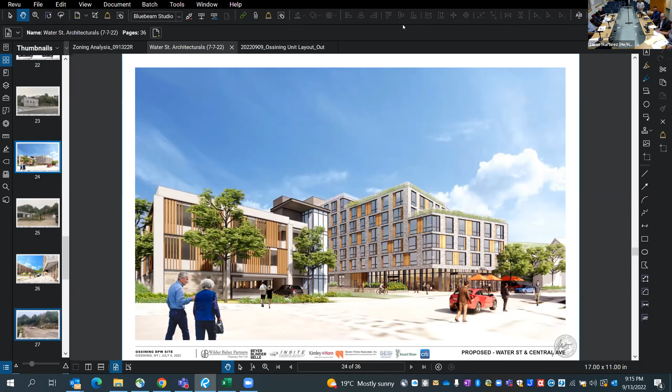Speaking of the public, for Linda or perhaps for Jaime, do we have any special obligation here with regard to the fact that this is village-owned property, to do anything beyond normal public notification? No, but there's been so much public notification, and there has not been any public planning board meetings.

So to give you a little background, the process started, I started here in 2020 I think, that summer there started discussions about it. There was a seven-part public engagement process where they went over multiple different components and details, some of it online too, before they even did anything. Once they selected candidates they went through this process, and then there were more stops, more public hearings. So there's been more public hearings on this than any project probably there's ever been. And I can actually give more information.

I don't know if they remember, but I was on the village board when we first talked about redoing that DPW site, and I do believe that they gave us information way back in 2007 or 8, and very similar to what it is today. So this has been around for a long time.